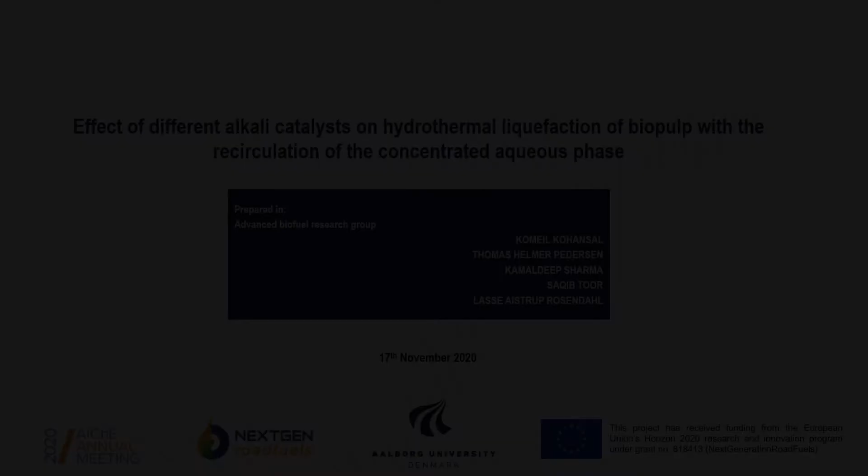The title of this study is the effect of different alkali catalysts on hydrothermal liquefaction of biopulp with the recirculation of the concentrated aqueous phase, which is carried out in the Advanced Biofuel Research Group with the collaboration of my colleagues Thomas Helmer Pedersen, Kamaldeep Sharma, Saqib Toor, and Lasse Aistrup Rosendahl.

To highlight the importance of taking care of worldwide municipal solid waste production, it is crucial to say that around 895 million tons of municipal solid waste is being generated in America, Europe, and Asia annually. It is noteworthy to say that the USA itself is producing around 27% of annual municipal solid waste, a number around 242 million tons every year.

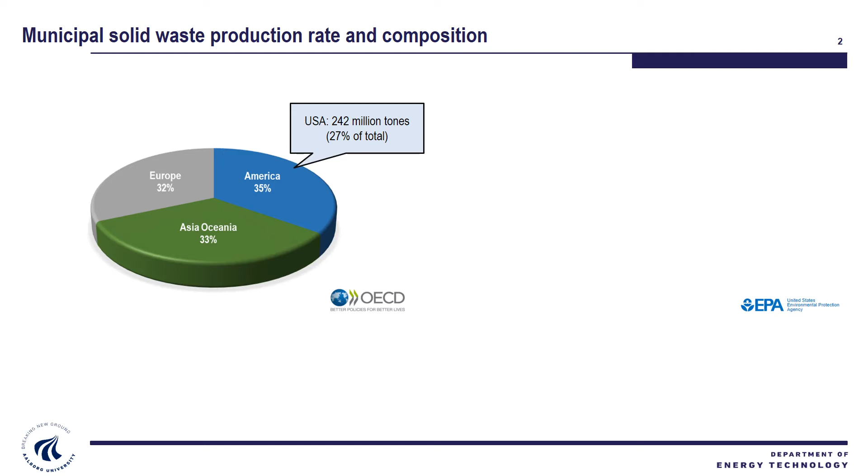Urbanization and increase in birth population are the two main reasons that can cause such a high number. By increasing the generation rate, the need for finding suitable valorization techniques is becoming urgent more than ever before. To find efficient, environmentally friendly techniques, it is important to consider the composition of the waste.

Even though with the help of valorization techniques like recycling, the non-biodegradable materials are being reused to some extent, there is no efficient technology to take advantage of the organic fraction, which literally is an important source of energy and chemicals. Just by considering waste wood, yard trimming, and waste food, around 35% of the whole municipal solid waste can be classified as the organic fraction that has the ability of producing specific chemicals and energy carriers.

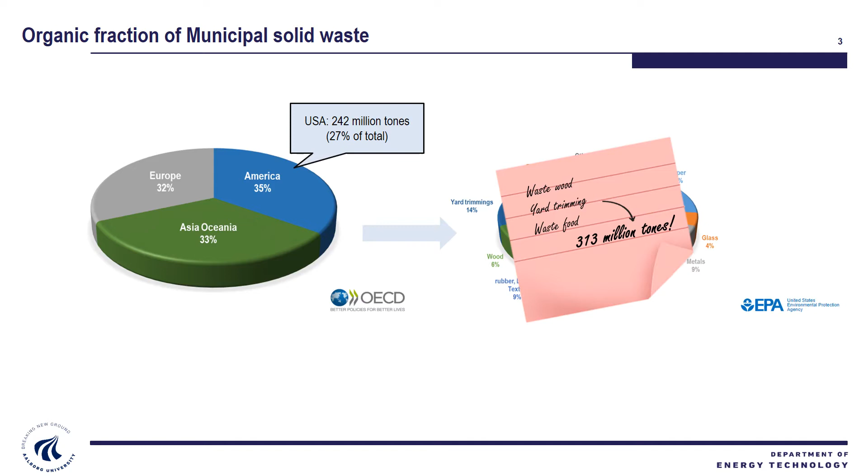Here, some of the conventional disposal techniques can be seen in the energy and mass cycles. Due to the simplicity of treatment, landfilling and incineration have been the pioneers in treatment of municipal solid waste for many decades. However, based on the higher production rate of municipal solid waste and the disadvantages they can offer, thinking about an eco-design technique that can not only dispose of waste but also make value-added material out of it is of great importance.

The technology that we offer is hydrothermal liquefaction, which can effectively convert the biomass to a liquid energy-dense fuel at mild temperature and high pressures. However, in this way, some challenges need to be overcome. Due to inefficient source segregation, municipal solid waste always contains a significant amount of non-biodegradable materials like plastics, metals, glass, and so on. To prevent any malfunctions during the HTL process, the non-biodegradable materials need to be eliminated. In this regard, a mechanical treatment named the Ecogi process was used to treat municipal solid waste in this study.

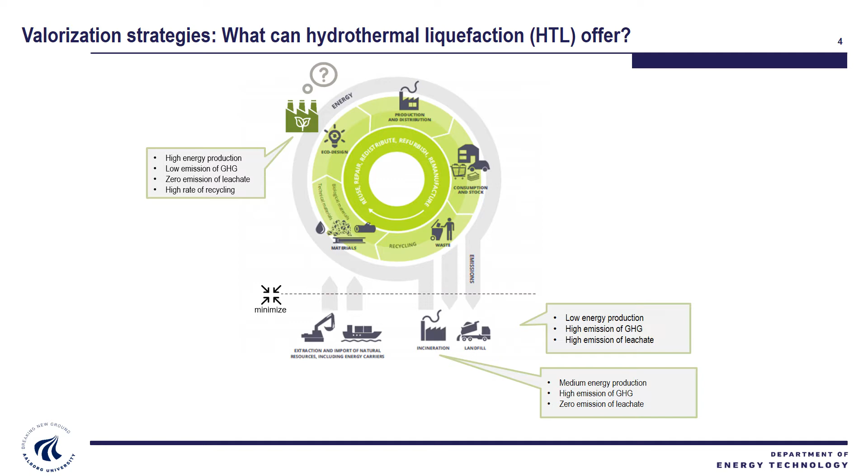With the integration of hydrothermal liquefaction, Ecogi, and a refinery facility, it is potentially doable to close the CO2 cycle with the utilization of the produced waste in urban areas and generate a green fuel which is compatible with the existing infrastructure. Additionally, the separated non-biodegradable materials in the Ecogi process can be returned to the use cycle by employing a recycling facility.

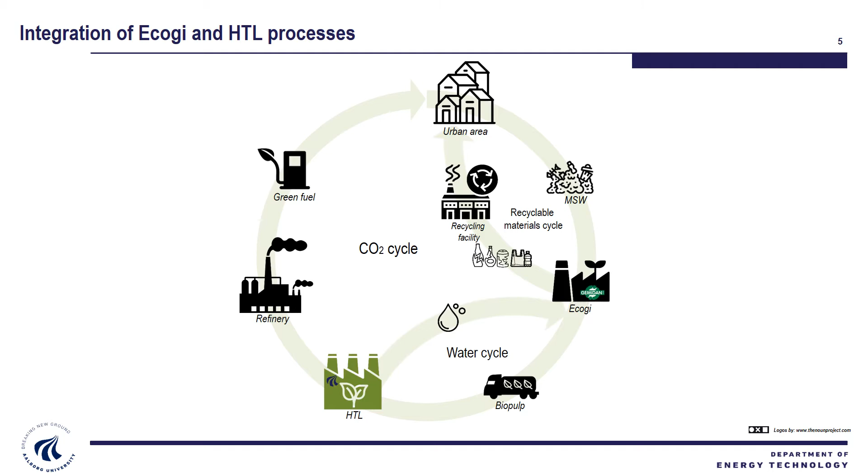So now is the time to explain what exactly Ecogi is and what it does. The Ecogi process is a mechanical biomass pretreatment method that can effectively separate non-biodegradable materials like polymers, metal, and glass with dilution of the whole material in water and passing it through specific sieves using pressure. The separated organic fraction will be considered as a pre-prepared biomass named biopulp, which contains 83% moisture, 15% dry matter, and only 1.6% ash.

It has been reported that the optimized dry matter content for biomass in an HTL batch is between 15 to 20%, while biopulp already has 15% dry matter content, so it can be used directly in hydrothermal liquefaction without addition or removal of water. Based on the physical analysis, it contains a considerable amount of cellulose fibers, which can effectively be degraded in the hydrothermal liquefaction medium to the wanted substances. Since the ultimate aim is using biopulp in a continuous plant to produce fuel, it's important that the biomass is pumpable, therefore no clogging issue would be expected during continuous HTL.

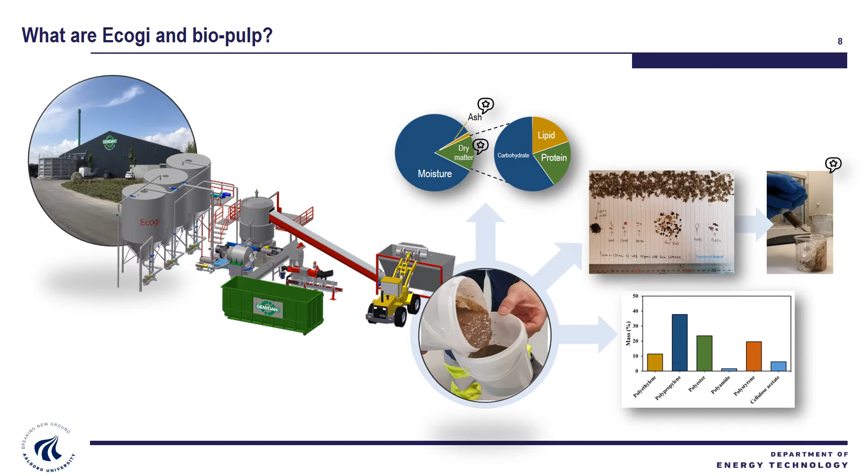However, the negative point of biopulp is the microplastic that it has. Microplastics have been subject to a lot of government restrictions in recent years due to their perilous impact on the environment and animals. Overall, it contains 0.27 grams of microplastic per kilogram of biomass. It is true that at first glance it may seem a negligible number.

However, multiplying this number by the number mentioned at the beginning can face us with millions of tons of microplastics that can be spread in the environment if it isn't taken care of immediately. Due to the harsh medium in hydrothermal liquefaction, we suspect that along with the biomass macromolecules, these microplastics can be degraded to a high extent. However, it is not the main target of this study.

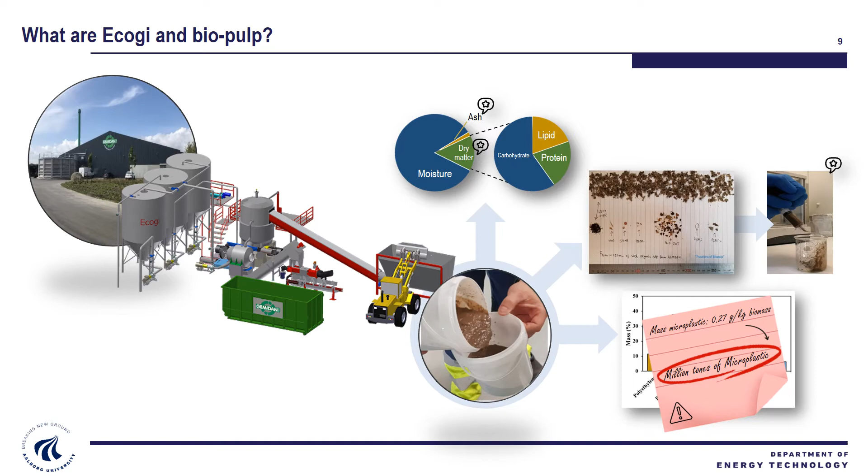As mentioned before, biopulp will be used in a batch hydrothermal liquefaction series of experiments to monitor its efficiency in biocrude production. Based on the previous experiments, two potential pathways are examined to increase the biocrude production yield. Catalytic hydrothermal liquefaction, in which we use four different alkali catalysts, including sodium hydroxide, potassium hydroxide, sodium carbonate, and potassium carbonate. The second way is the circulation of aqueous phase.

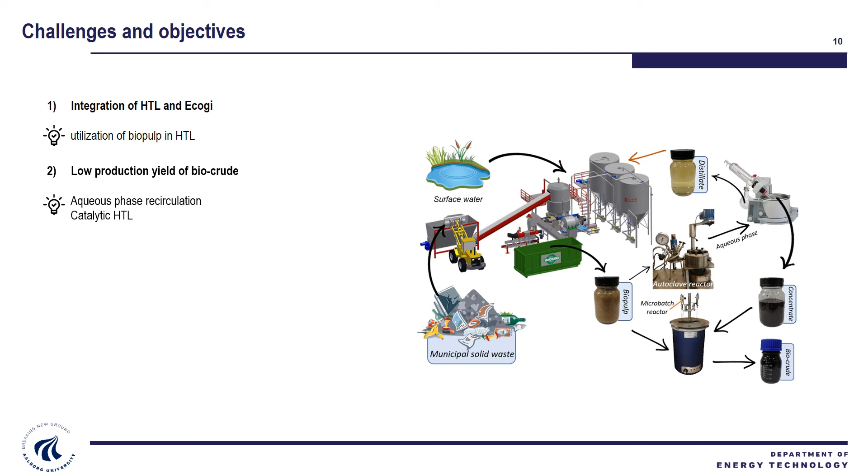However, since the biopulp already contains 83% of moisture, the aqueous phase will be evaporated to keep the dry matter content of the batch constant. Additionally, the effect of each catalyst on first circulation batch is examined. At the end, a full recirculation is done to thoroughly monitor the effect of concentrated aqueous phase recirculation on hydrothermal liquefaction of biopulp.

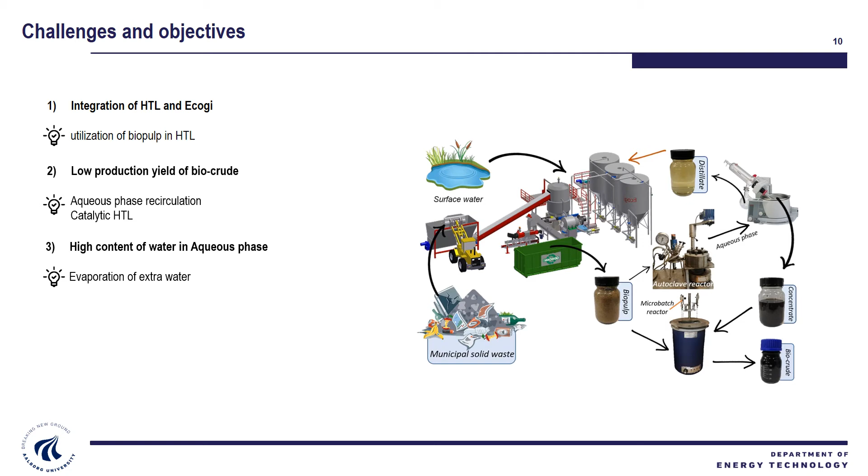The reference experiments were done in two parallel batch reactors, which contained 8 grams of biomass and 2 weight% of each catalyst. Non-catalytic experiment yielded around 30.6 weight% of biocrude, which can be considered as a promising biomass for hydrothermal liquefaction. Among all different alkali catalysts, potassium carbonate showed the highest efficiency in biocrude production. Sodium carbonate had also a positive effect on biocrude yield, while sodium hydroxide and potassium hydroxide did not increase the yield.

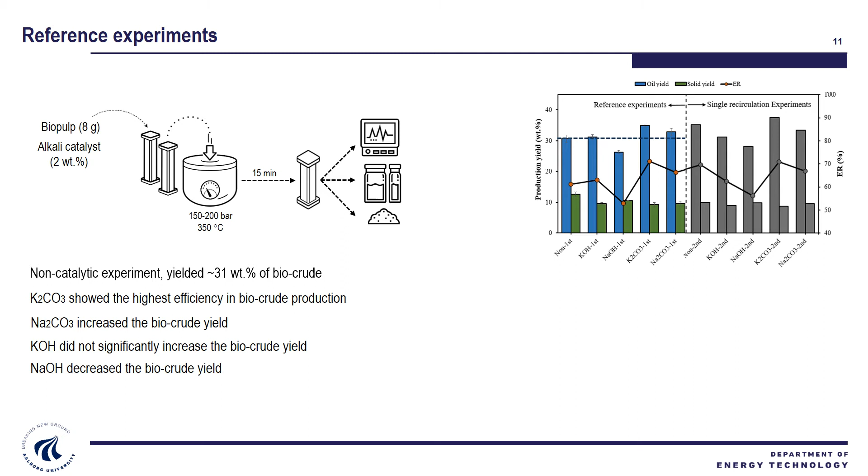Based on the mechanism proposed by Yoneda, the sodium carbonate and potassium carbonate catalysts are able to generate formate and hydroxide ions during reaction, which can ultimately act as the secondary catalyst and target the glycoside bonds of cellulose and hemicellulose and increase the biocrude yield. That is the potential reason for higher activity of the carbonate catalysts. Based on the elemental analysis, all the catalysts were able to increase the biocrude quality by deoxygenation reactions such as decarboxylation. Additionally, because of the pH elevation, all the catalysts suppressed dehydration reaction, which could form unsaturated compounds.

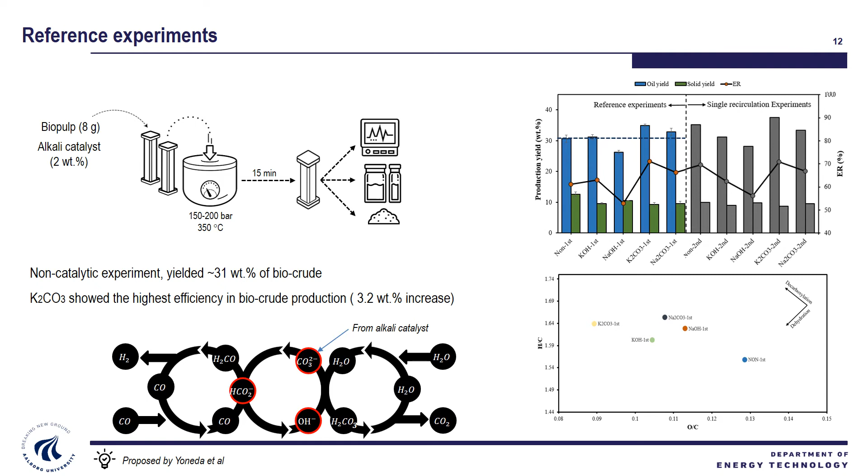To explain the lower biocrude production in the presence of hydroxide catalysts, two main reasons can come to the mind. The first, which will only happen in the case of sodium hydroxide, is the unrecoverable foamy layer that was generated. This layer was not recoverable neither in biocrude nor aqueous phase. Therefore, the carbon and nitrogen loss in sodium hydroxide case was higher than potassium hydroxide. Another reason can be the activity of this catalyst on production of light polar molecules that were soluble in water, so they did not recover in the crude phase and therefore the yield decreased. As can be seen, the highest carbon and nitrogen in aqueous phase was related to the sodium and potassium hydroxide cases.

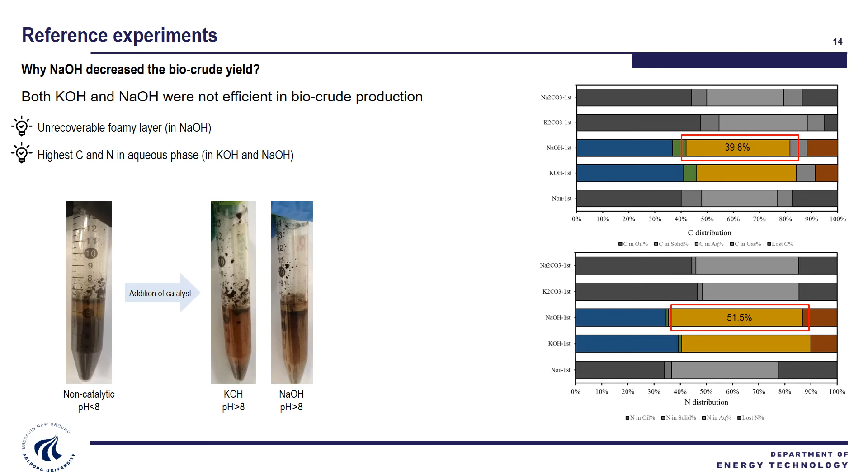In the next step, a single concentrated aqueous phase recirculation was conducted where the extra water was removed using a vacuum rotary evaporator. The distillate phase can be returned to the Ecogi process and be substituted by the fresh water. Recirculation of the concentrated aqueous phase has a positive impact on biocrude production in all cases, with enriching the biocrude phase with light oxygen and nitrogen containing polar compounds. From the Van Krevelen diagram, it can be seen that by single recirculation, the properties of oil change significantly and the oil absorbs more oxygen and nitrogen.

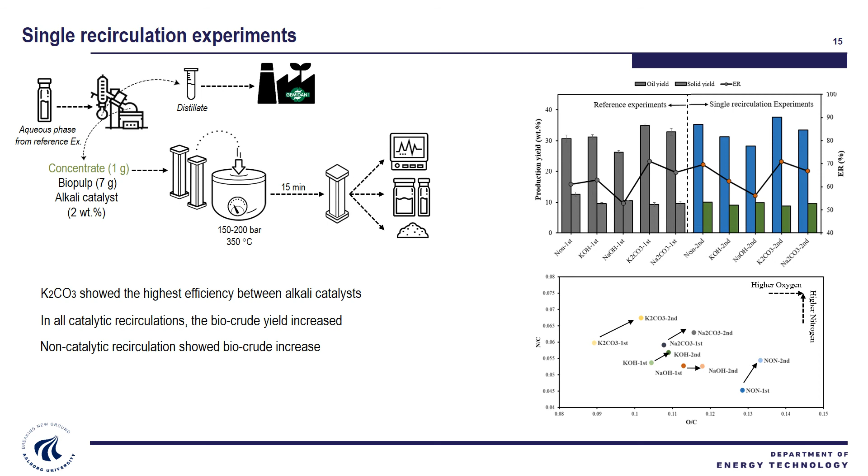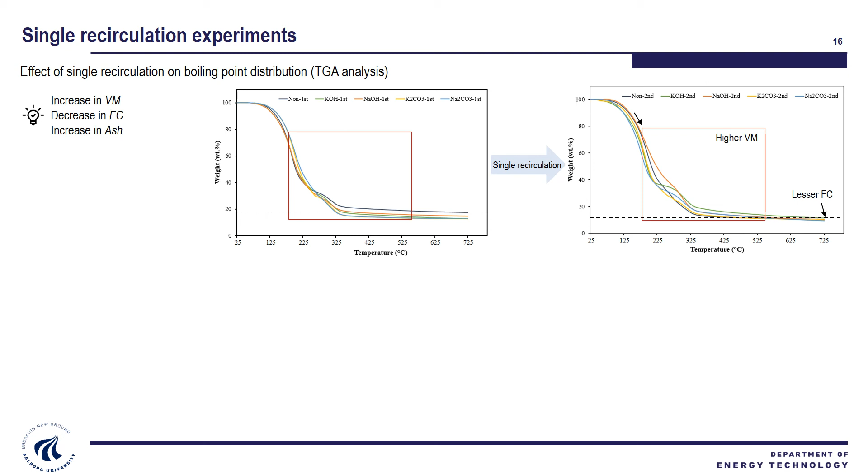As mentioned in the previous slide, single recirculation of aqueous phase enriched the biocrude with light organics. Therefore, the average boiling point distribution of the compound decreased. As can be seen in the TG diagrams, after recirculation, the volatile matter increased, whereas the fixed carbon decreased. Based on the ash measurements, due to the concentration of the catalyst while recirculation, the ash percentage of the biocrude samples increased slightly. Moreover, after recirculation, the carbon recovery in the oil phase increased while using potassium carbonate as the catalyst. Therefore, potassium carbonate was selected as the most efficient catalyst and a full set of recirculation experiments were carried out.

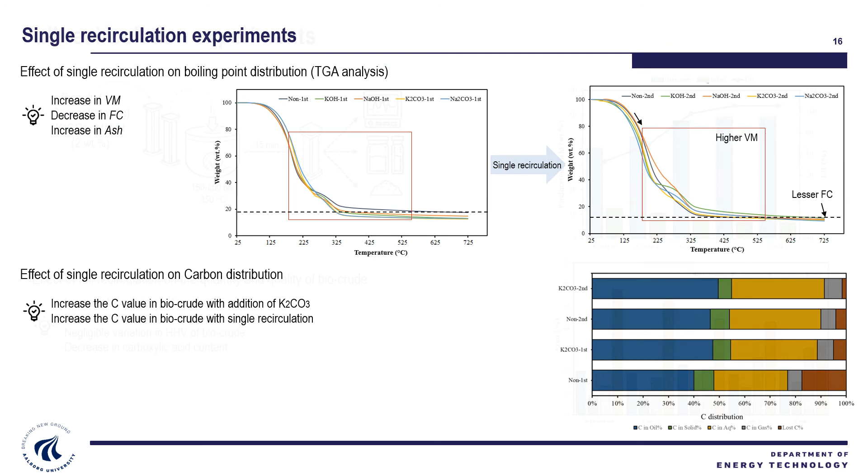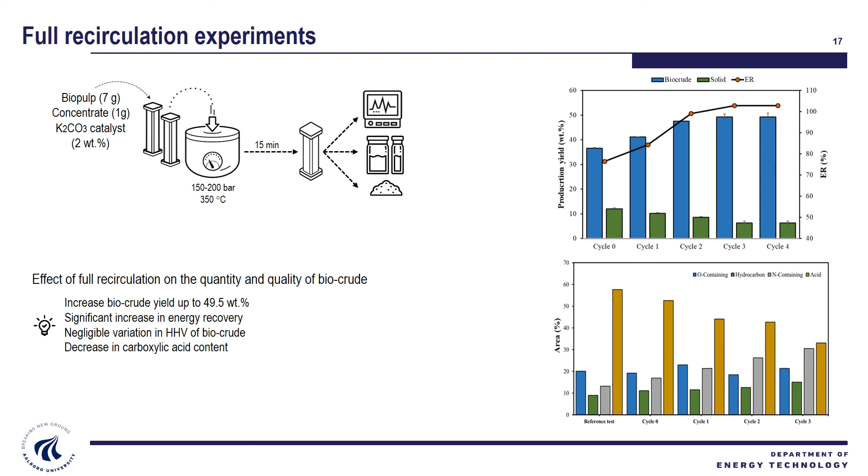And for future topics, I would say that investigation on the effect of hydrothermal liquefaction on microplastic and inorganic distribution of biopulp, which are ongoing in our research group, and eventually the effect of catalyst adjustment while recirculation of the concentrated aqueous phase can be studied in next studies.